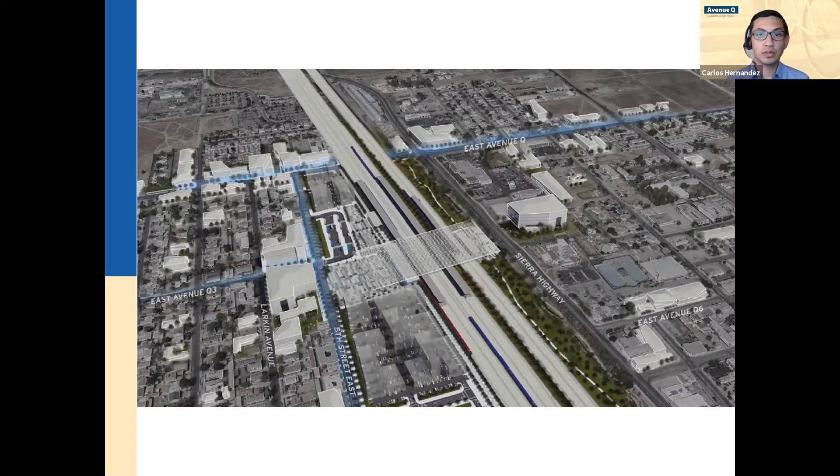Next slide. As mentioned, our project boundaries are Avenue Q from Sierra Highway to 20th Street, approximately 1.4 miles. The street today is one traffic lane in each direction. As you can see in this image, there's a lot of undeveloped space, so there are a lot of opportunities to reimagine what this street can look like.

Here are some of the goals for this project, directly tied to the definition of a complete street. We want to make sure Avenue Q improves conditions for people who choose to walk or bike, with continuous bike lanes and continuous sidewalks along the corridor. We definitely want to incorporate shade recommendations, since we know how hot and windy it can be, especially in the summer. We're also going to complement the city's general plan update, since there's a lot of work happening on that end.

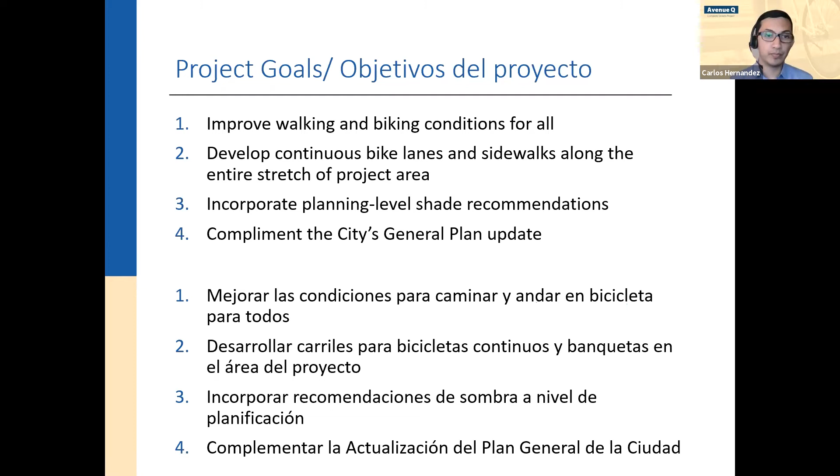Before we get into the details, we'd love to take a quick poll, open up for discussion, and really understand the community's perception of Avenue Q and how often they use it. So we'll start off with a poll.

On your screen you should see two polling questions. We're going to do two at a time, so I'll read them off and you can make your selection. After you've answered both questions, we'll see how many people have answered and then present the results. These questions focus on current use of the Avenue Q corridor. The first question: Do you walk or bike to destinations in and around the Avenue Q corridor? Select one: A is walk, B is bike, C is both, D is none of the above. The second question: To which destinations do you walk or bike? Select all that apply: A school, B work, C home, D bus stop, E park, F businesses and stores, G exercise, H fun, I none of the above, J other. Go ahead and take time to answer those two questions, and after a high percentage of people have finished, we will present the results.

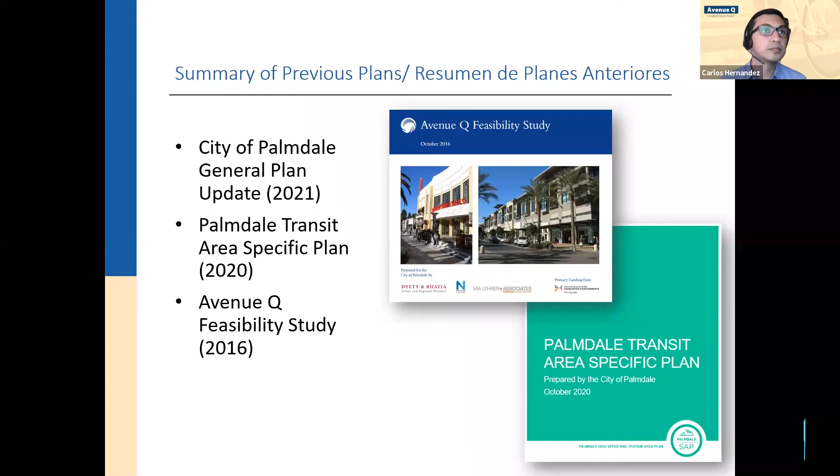Those previous plans are very helpful. In our work, we also want to really get to understand Avenue Q and its impact on the community. So we've divided our mapping and analysis work into 4 main categories: who's impacted along Avenue Q, how does it function for people today, how do people generally get around, and how comfortable is Avenue Q to get around without a car.

Next slide. So I'm going to go over a few of these, and Adam's going to join me as well to cover those 4 main sections of analysis that we've done. So let's start with who's impacted along Avenue Q.

This is a quick, high-level summary of our findings. We know that children, families, and older adults are impacted in this project area. They represent more than 1/4 of the population. We also know that children and older adults are some of the most vulnerable road users—they're not typically driving as often, and they're statistically some of the most vulnerable people on streets when we look at collisions.

We also understand that there's a higher environmental burden in this area, the east side of Palmdale. When we look at CalEnviroScreen, the east side of Palmdale faces higher environmental issues compared to the rest of the city. That includes higher exposure to pollution, to traffic, and also poverty levels, education attainment, things like that.

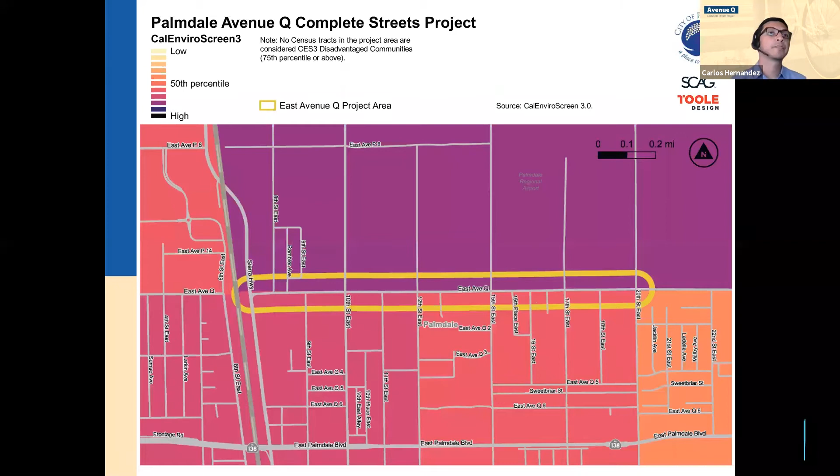Land use is a key component of this project. As the area develops, we want to make sure the street can support future investment and encourage people to walk and bike more. Our team is coordinating work on Avenue Q with the general plan update as well.

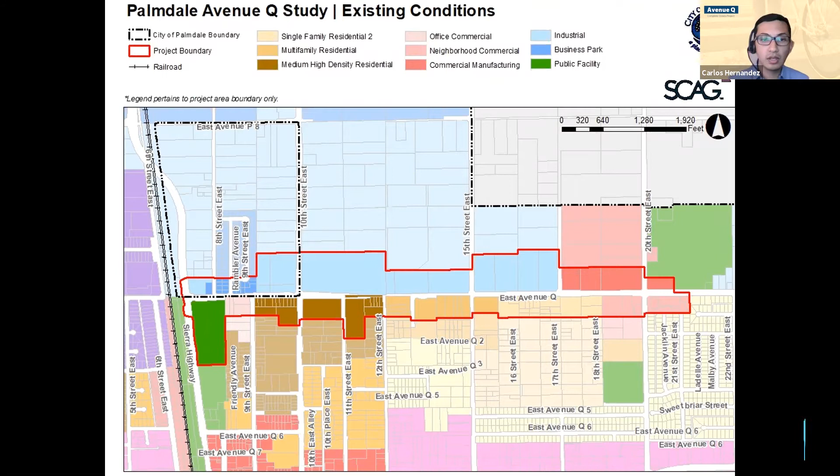We also have some higher density neighborhood residential, something that can match what we see today on the southern part of Avenue Q - more housing, more residential opportunities. Part of this project is really to connect people to the transit station and make sure Avenue Q serves everybody who lives there.

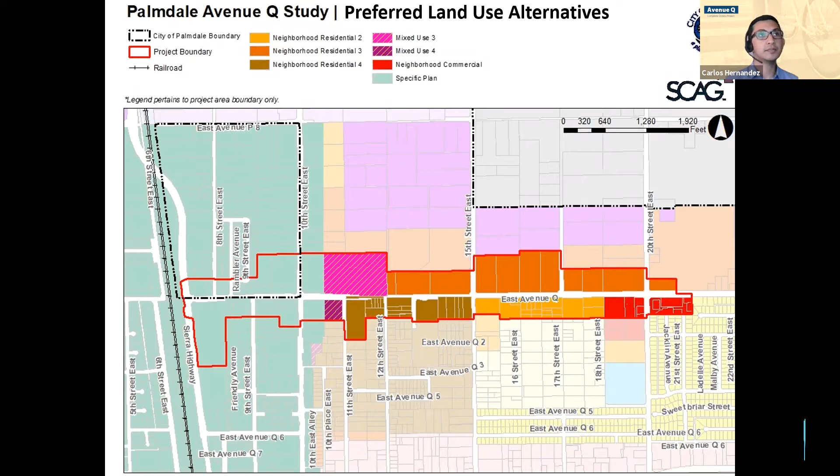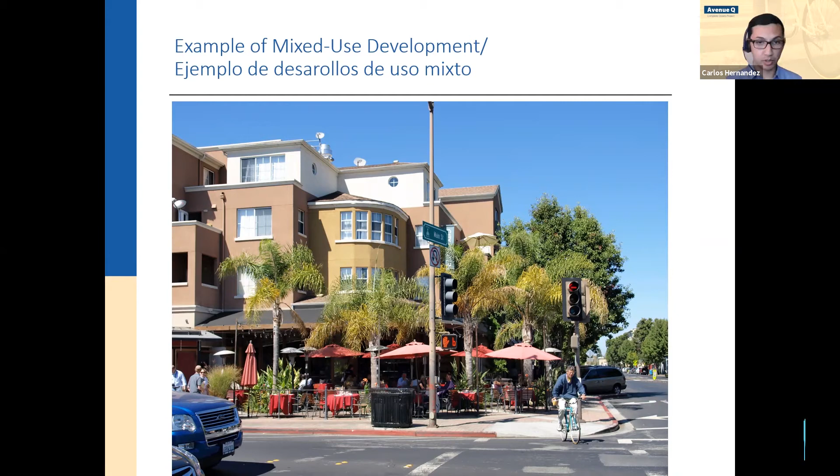Now I'm going to hand the mic over to Adam, my colleague, who's going to talk about how Avenue Q functions for people today. Thanks, Carlos. So for the most part, if you use Avenue Q today, you know it's pretty one-dimensional and its main function is really to serve people driving, as Carlos has been talking about.

If you walk along Avenue Q today, or cross it to get to important destinations, you know there are few safe crossing opportunities and quite a few gaps in the sidewalk, meaning you may find yourself walking on the side of the road on unpaved ground. You've also noticed the vacant lots in this area that Carlos touched on, and these will likely develop over time, so direct connections to them will be really important for the community. Just keep that in mind as we talk through this presentation.

As I mentioned, Avenue Q was primarily built for automobiles, but it also serves as an important east-west connection between Sierra Highway and Eastern Palmdale. Traffic volumes are pretty low today, and if you drive along it, there isn't much delay. You can drive probably about as fast as you want because there aren't many cars and the roadway is really wide.

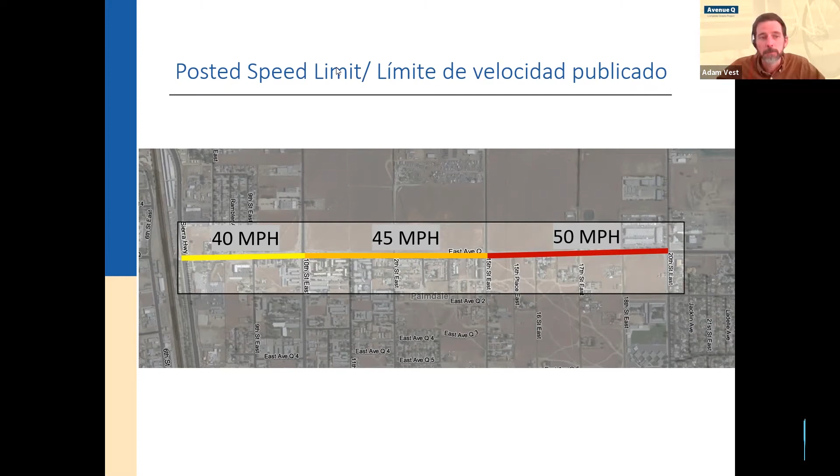Our team also looked at the walking network around the project area, specifically sidewalk gaps. There are some areas with paved sidewalks, mostly around developments that are residential or commercial today. But there are really a lot of undeveloped and disconnected sidewalks out here as well.

On these images, you can see existing sidewalks in blue and missing sidewalks in the magenta or purple-pink color. This image is an example of one of the nicer sidewalks, with street lighting and vegetation along it in the area.

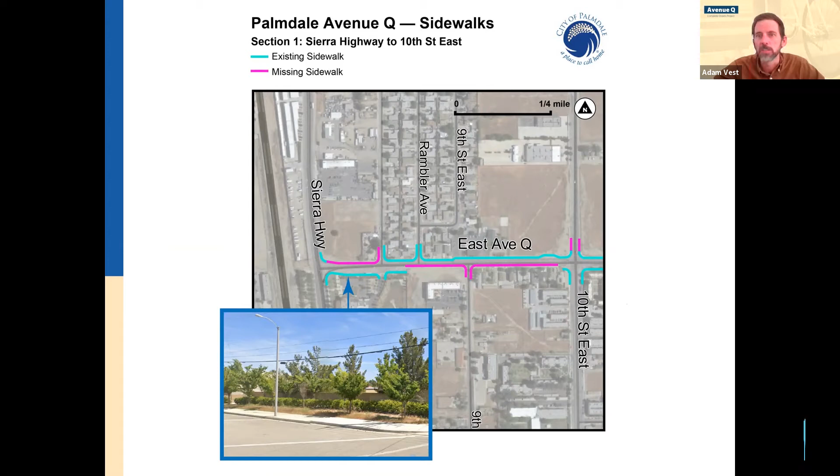So in the study area, there are actually only 2 marked crosswalks, one at Sierra Highway and one at 10th Street. We want to be able to increase safe and comfortable crossing opportunities, and that's really a key element of this project.

And these are just some more examples of what it's like to maybe walk along this area out here today.

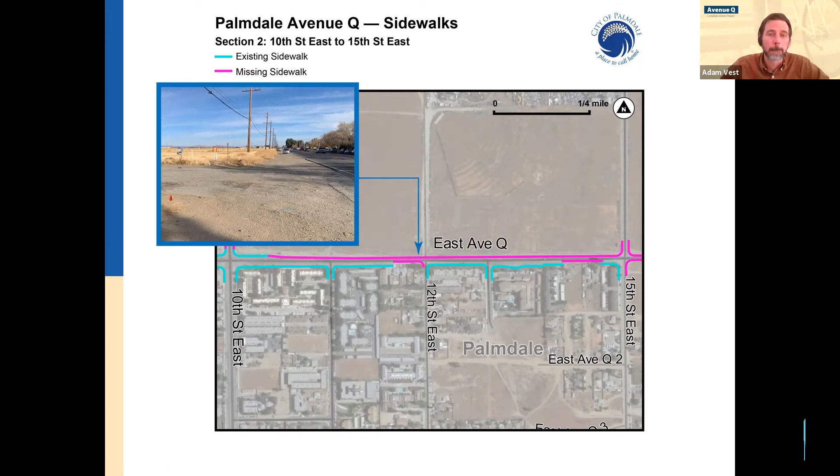As I mentioned, there are some sidewalks along some of the commercial uses, which is important for people that are trying to walk to get to these places.

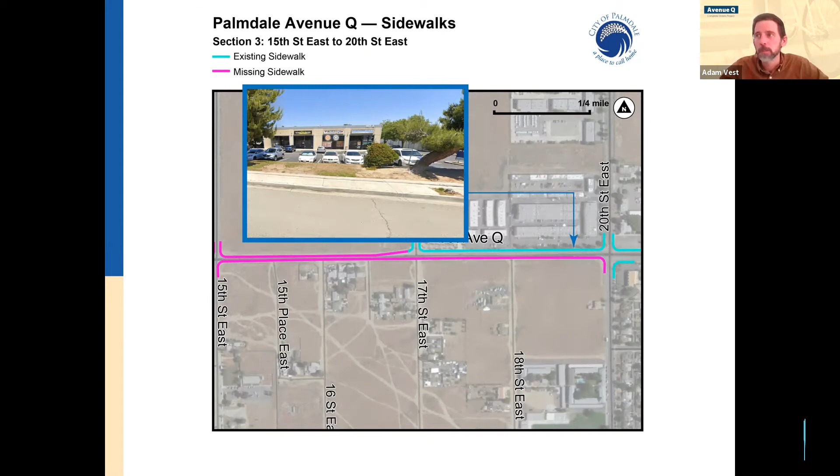Here are also a few photos of the sidewalk conditions on Avenue Q. You're probably already pretty familiar with conditions like these and how they can affect getting around without a car. I'd say especially the photo on the right, where the grade of the shoulder is very steep and it's very difficult to walk on. But if you're on that side of the street, that's ultimately what the option is.

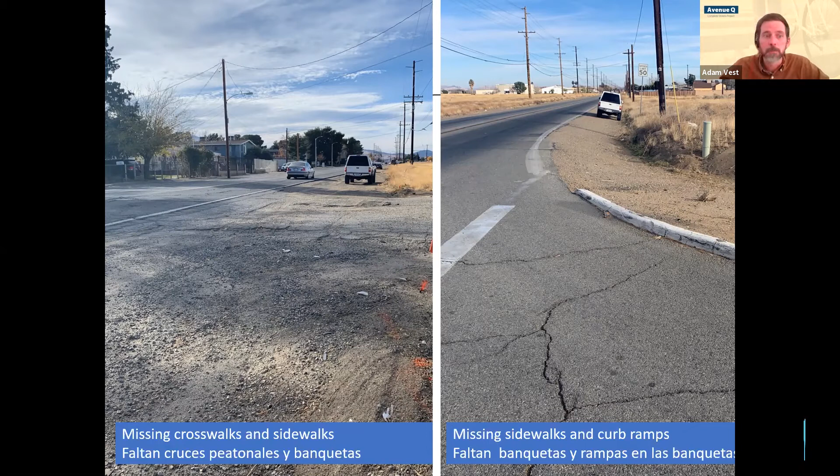So how do people get around today? We heard a little bit about it from the poll that you took, at least from the people on this call. But to answer this question, we have to look at options people have. We looked at the missing sidewalk network, but it's also important to take a step back and see that the blocks on Avenue Q are also really large, and that limits crossing opportunities, among other things. So part of this project will be looking at physically and visually breaking them up and creating more enjoyable destinations along the street.

We also know that few people are taking transit today, and the pandemic has had a huge impact on bus riders. So while transit along this street has low ridership, there are established routes along Avenue Q and opportunities for increasing service in the future as well. For people who do want to bike or are biking on Avenue Q today, the network is really incomplete, and it's difficult to get to the Metrolink station or other destinations safely and comfortably.

On this map, the blue lines represent bus routes on and around Avenue Q. Bus route 98 is the main route on Avenue Q, and that currently connects to the transportation center. There are a couple other lines that stop at the sheriff's station, for example. I mentioned that bus ridership is really low today, but it can increase once more people start commuting to work or school more regularly post-pandemic.

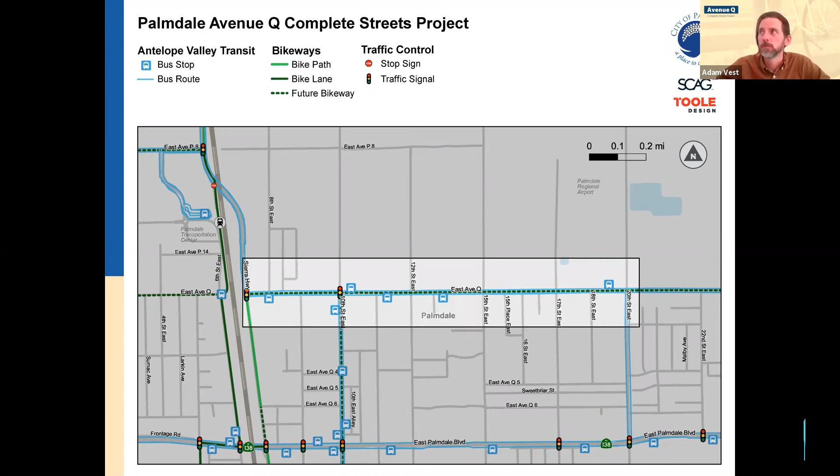Here are examples of the bus facilities on Avenue Q, at least a couple of them. Obviously, there's a clear difference between the bad and the good. This project will also be identifying opportunities to improve bus stops along Avenue Q so that there is protection from sun and rain, wind, those sorts of things.

And here's one bike facility that is near Avenue Q, which is the trail that I mentioned previously. It's really nice, but again, how do we actually connect to it and how do people get to it safely? So at this point, I'm going to turn it back over to Carlos, and he's going to talk a little bit about how comfortable it may or may not be to use Avenue Q today.

Thanks, Adam. Next slide. So we've talked about who's impacted generally on Avenue Q, how the street functions for people, and how people are able to get around.

We also looked at how comfortable Avenue Q is for people as they travel. And what we found at a very high level is it's a pretty high stress street in terms of walking and biking. We've looked at collisions and the collision history along Avenue Q. And we know that there's a lack of shade, specifically on the northern side, and we'll show you some examples of our analysis for that.

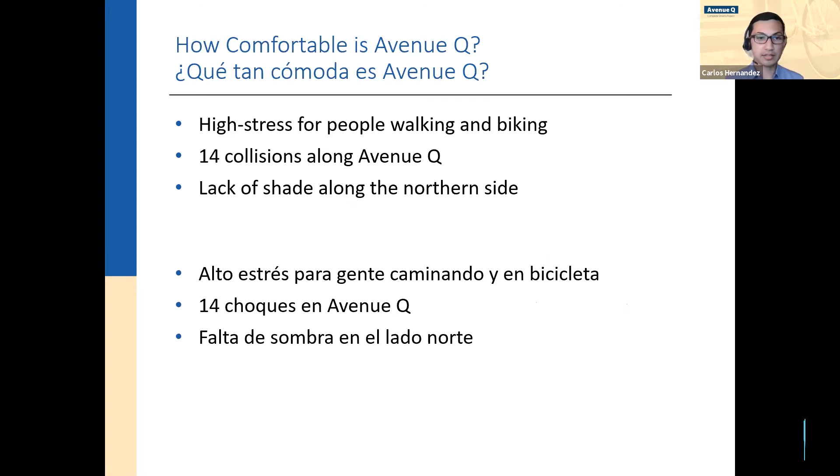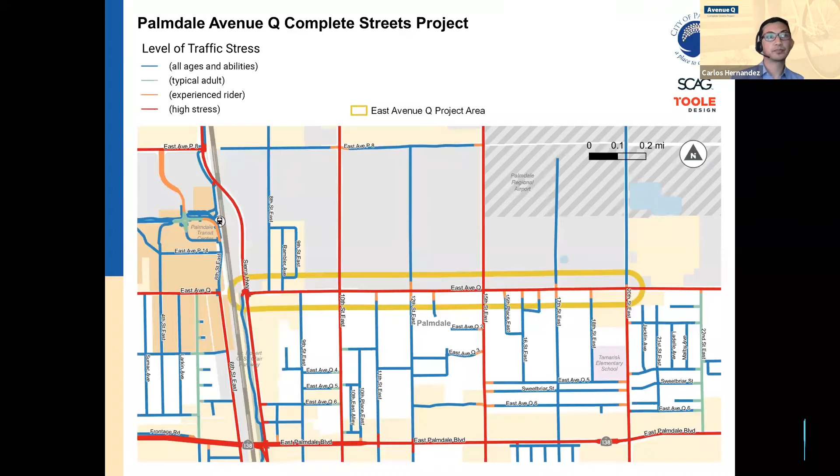This is one snapshot of looking at safety on the street. We saw the map earlier with the posted speed limit of 40, 45 to 50 miles per hour. Even though historic data tells us there may not be a lot of severe or fatal crashes for people walking or biking on Avenue Q, we understand that the conditions there can cause crashes in the future. So we want to make sure through this project we address things like speeding and the lack of safe crossing opportunities.

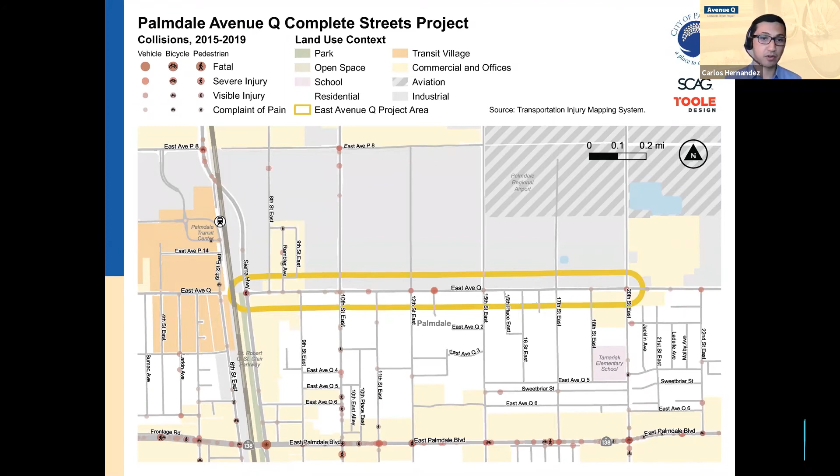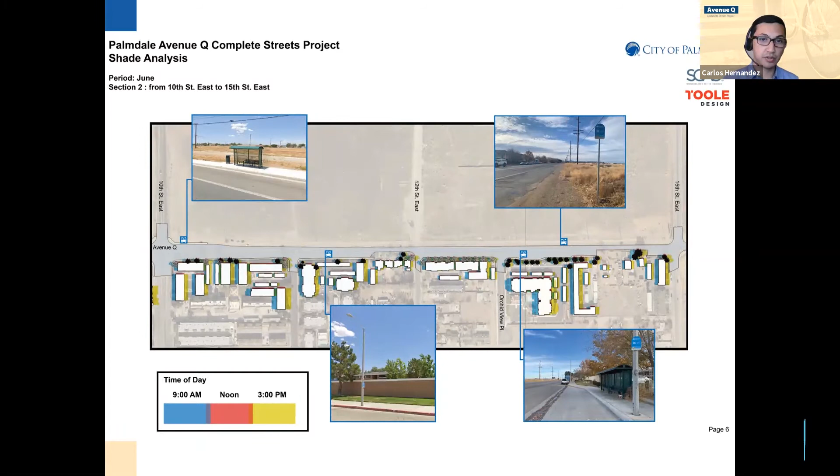But if we look at the next slide, we captured that same stretch of Avenue Q from 10th Street to 15th Street during the peak summer month of June, when the sun hangs a lot higher. Shade here is pretty much non-existent, and the south side has full sun exposure at all times. So through this project, we want to make sure we find opportunities to create more shade.

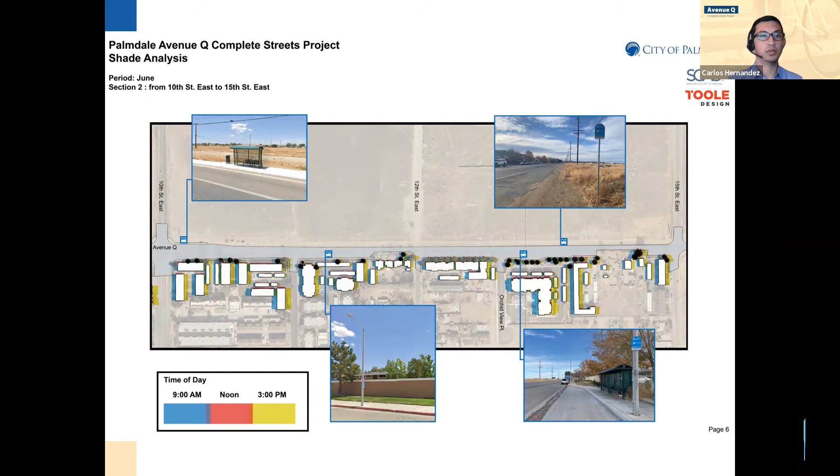To summarize our existing conditions work: Avenue Q was primarily built for driving on. There are few safe crossing opportunities or marked crossings that exist there today. We know it's higher stress, especially for people riding and trying to connect from the neighborhood to other destinations. But as much as these are constraints, there's also a lot of opportunity on Avenue Q, and we think this project should connect residents to destinations and really improve the quality of life for everybody in the neighborhood.

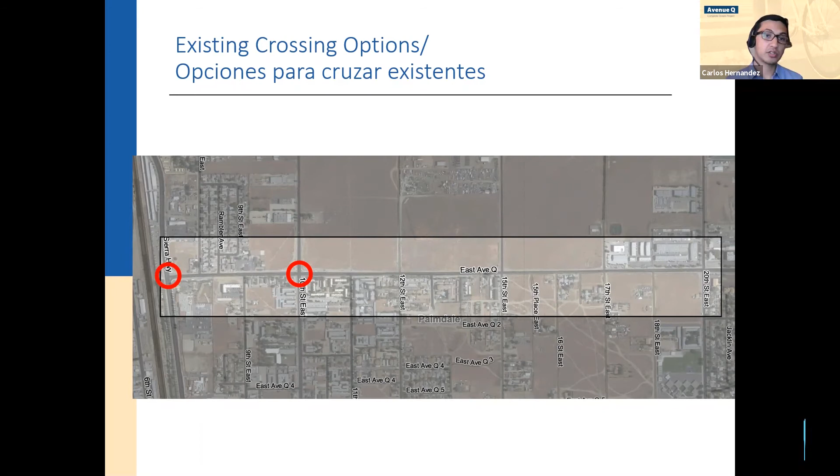And if you go to the next slide, in terms of opportunities for more marked crossings, we're looking at places like 9th Street, 12th Street, 15th, 17th, and 20th Street to be able to have different types of marked crossings. So just safer, more consistent opportunities for people to cross Avenue Q.

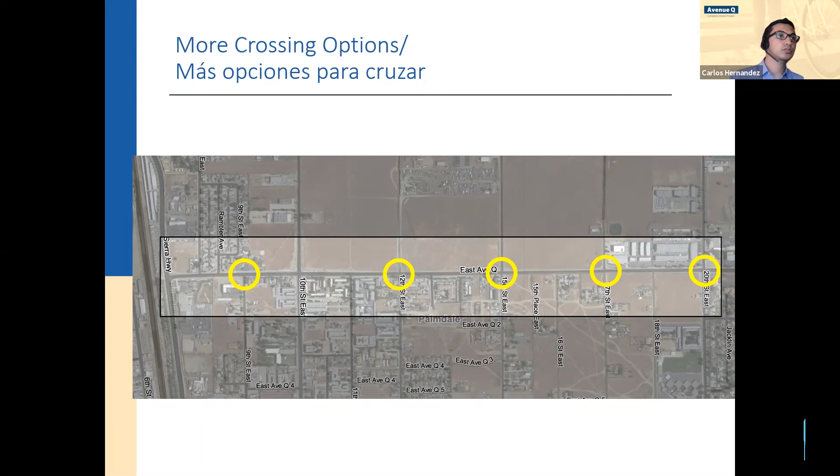Another opportunity is we want to establish continuous bike lanes on Avenue Q. Again, it's one of the key goals for this project. We want to make sure that residents from the neighborhoods, from the area, can directly connect to the Metrolink station and the future high-speed rail station.

So we'll continue to investigate which type of bike facility we'd want to propose, and also get general feedback from the community.

Next slide. So at key intersections, I know one of these questions was asked, what happens on side streets. So we want to make sure that people that want to ride on Avenue Q in a safe way can connect to Avenue Q. At intersections, there's a few different ways to do this.

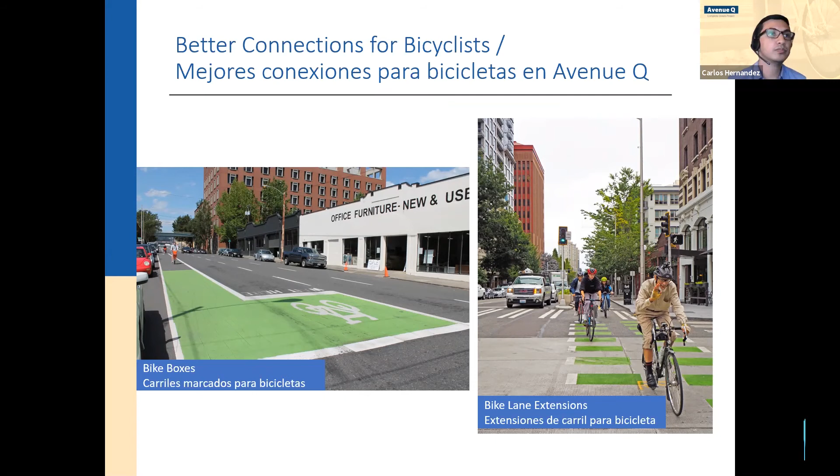Next slide. Developing consistent shade is another key opportunity. It's very important. I know we've talked about shade a lot.

We're gonna start by focusing on key locations like bus stops, where we can provide shade for people waiting, maybe standing there 20, 30 minutes. But we also want to establish a rhythm of shade throughout Avenue Q, using things like shade structures, tree canopies, or even the canopy of a building. You saw a couple of images earlier of the December snapshot where the buildings on the south side of Avenue Q were actually providing the sidewalk a lot of shade. So this is something we want to replicate and make sure there's consistent shade on Avenue Q.

And finally, Avenue Q should function for people taking the bus. We saw a couple of images of the bus stop conditions today. Some may just be a sign, others already have transit shelters, but this can include more frequent appearance of shelters, shelters that have amenities like benches, waste containers, real-time bus information. All of these improvements should work to encourage more trips without the use of a car and make sure people can connect via bus to the future high-speed rail station.

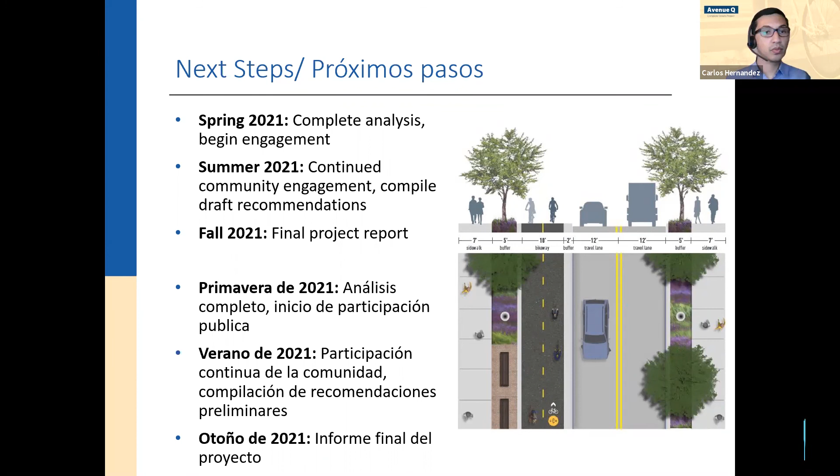We have just one more poll. We want to really understand how people are staying in touch, and get some general feedback from you. We have 3 questions in this poll. This is our final poll.

Have you taken the project survey yet? Simple yes or no. Second question: how did you hear about this meeting? You can select all that apply. If you heard about it in multiple ways, please check all those ways. It helps us understand how this works in terms of notification. Your choices are email, social media, mail, postcards, word of mouth, community neighborhood organizations, and other.

Your third question is, what are the most effective ways to reach your neighbors to ask for their input on this topic? Again select all that apply, and your choices are email, social media, mail, postcards, word of mouth, and community neighborhood organizations, and other. Please quickly fill out your results. Give you a minute or two to do that, and then we'll go to the results.